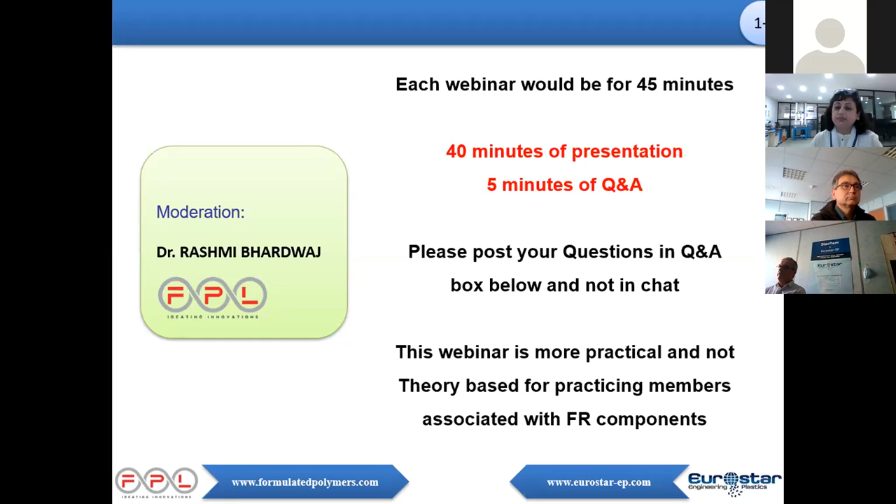This is the series which we are presenting. These are the flyers which have been circulated to all. We have completed 3 series: series 1, history, need and ISO classification of flame retardant chemistry.

Series 2, where we discussed flame retardant mechanism and selection criteria. Series 3, on testing of flame retardant characteristics, where we covered the UL 94 and the glow wire tests. Presently, we are doing series 4.

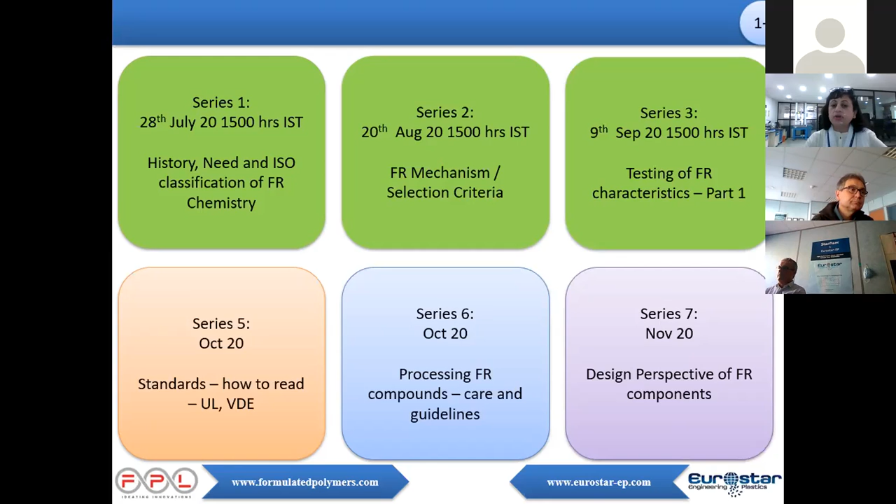Subsequently, we have planned series 5, which is on standards, how to read the UL and the VDE standards. Then we are doing a few more on processing, design perspectives, environmental impact, and some of our specialty products like cross-linked polymers.

We would appreciate if some industry professionals come forward and present some of the series. Some industry professionals have already agreed, so we are looking forward to their presentations. This is basically a learning program, and it's a revision for some and learning for others.

Since Eurostar EP and Formulated Polymers Limited specialize in compounds of engineering polymers, most of the examples will be based upon polyamides, acrylonitrile, butadiene styrene, polypropylene, and polycarbonates.

Now about the speakers: we have Mr. Krishnamoorthy, GM Operations, Formulated Polymers Limited. He has a master's in science with 29 plus years of experience in various fields including design, development, production, and quality assurance. He has almost 15 years of experience directly linked to development of 300 plus new products in the electrical, electronic, and automotive segments.

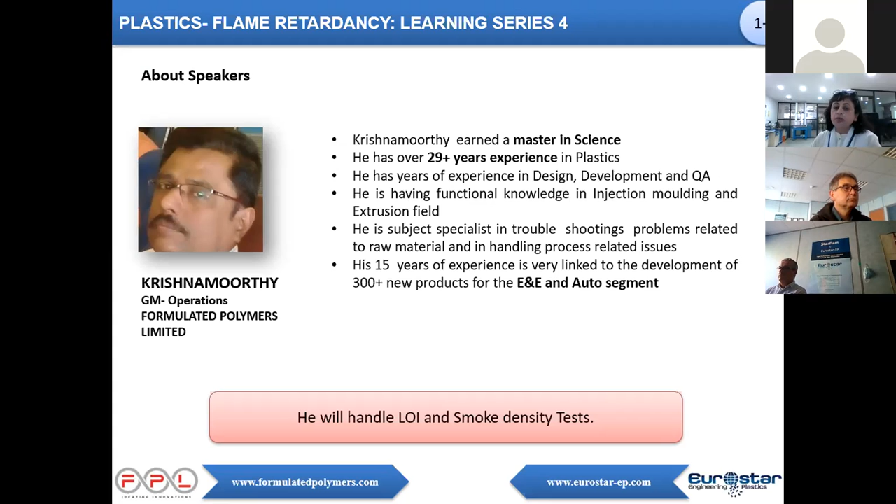Krishnamoorthy will be discussing LOI and the smoke density tests.

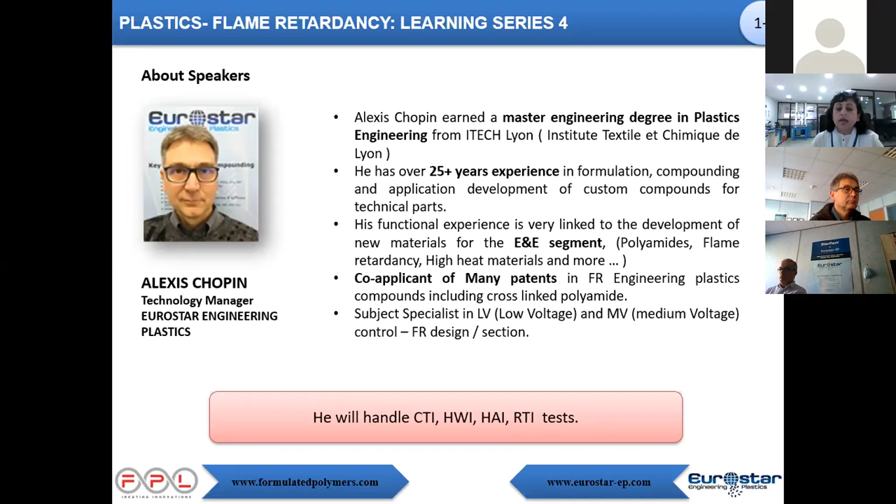Another speaker, Alexis Chopin, is Technology Manager at Eurostar Engineering Plastics. Alexis has a master's engineering degree in plastics engineering from ITECH Lyon. He has 25 plus years of experience in formulation, compounding, and application development. He is a co-applicant for many patents in FR engineering plastic compounds, including cross-linked polyamide. He's basically a very good subject specialist for low voltage and medium voltage controls, and he will be discussing CTI, hot wire ignition, HAI, and RTI tests in detail.

Just to do a quick recap of the series we've already carried out: the first series was basically on history, where we discussed fire accidents and the reasons why we started using flame retardants, as well as the ISO classification as per ISO 1043, which was discussed in detail.

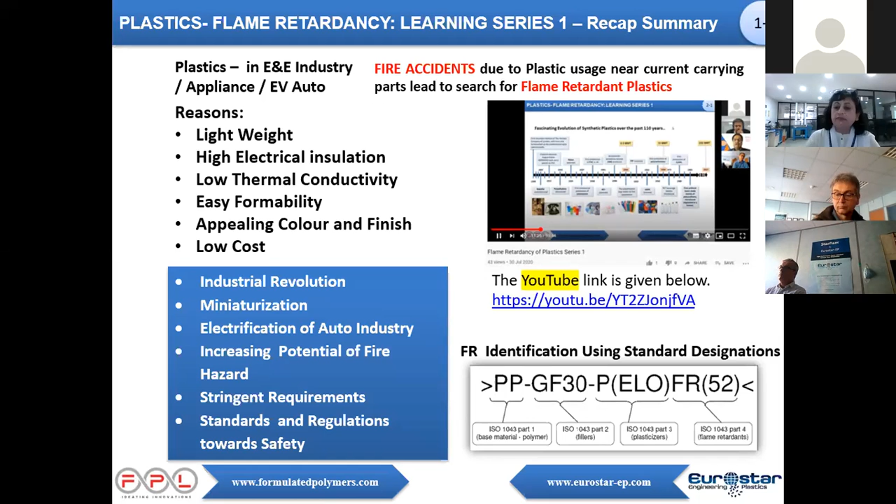Then we had series 2, where we discussed the flame retardant mechanism, various endothermic processes, radical quenching, thermal shielding, as well as the trend towards more environmentally friendly FR systems, and the legislations with respect to changes in environmental concerns.

We discussed halogenated, nitrogen, organic, and inorganic phosphorus compounds. We also discussed metal oxides, hydroxide salts, boron zinc compounds, silica compounds, and some specialties.

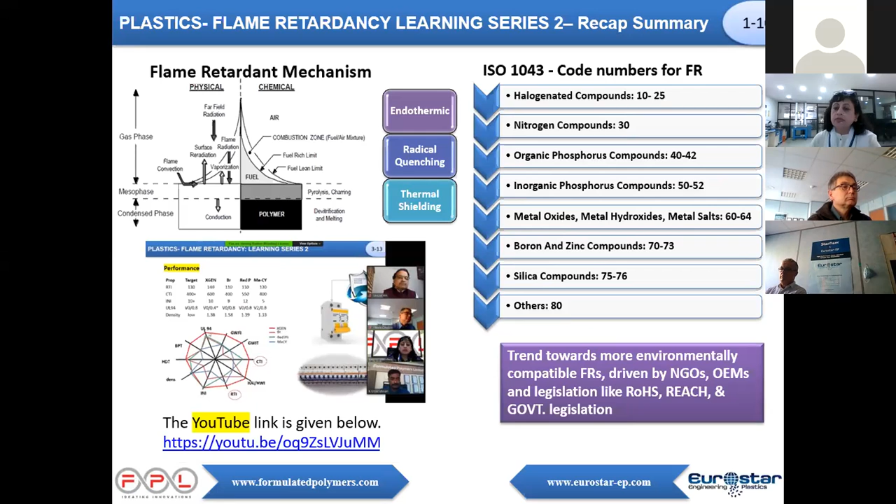This was our previous series 3, where we discussed in detail the flammability testing. UL 94 was discussed in detail with examples and actual applications. Glow wire flammability test was also covered, and we had live presentations showing how the entire test is carried out.

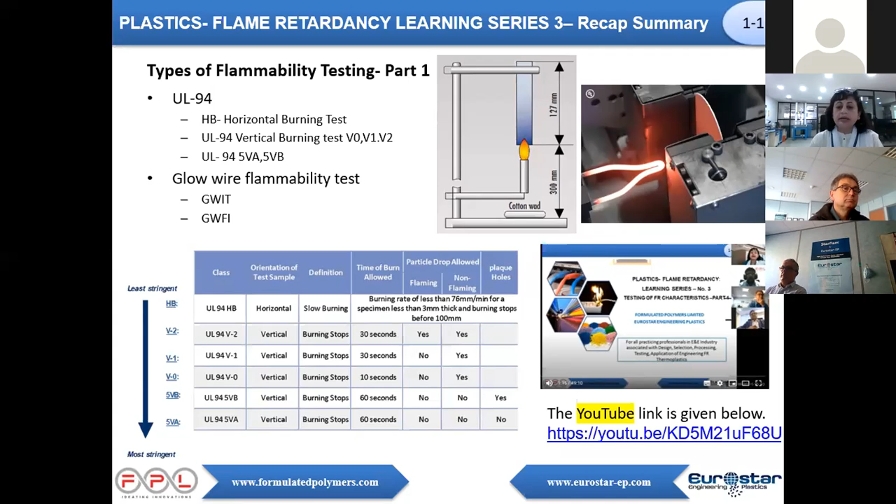I think now I'll hand it over to Krishnamoorthy. He will be discussing the tests. So I'll stop sharing now. Krishnamoorthy, you're invited to join.

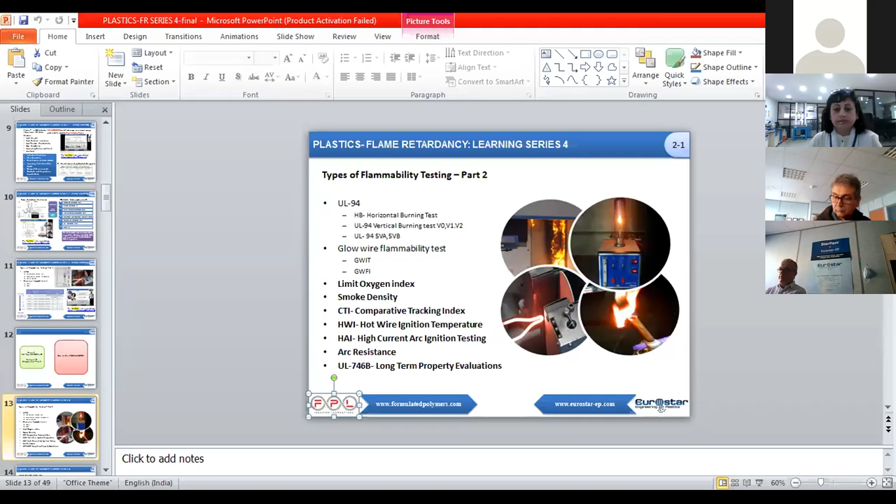This slide shows a list of flammability tests for plastics. This series of tests can help determine how products behave when exposed to flame.

Earlier in series 3, we discussed UL 94 and the glow wire flammability test, covering test standards, equipment required, test procedures, acceptance criteria, and areas of application in detail. In today's session, we are going to learn other flammability tests like LOI, smoke density, CTI, HAI, RTI, etc.

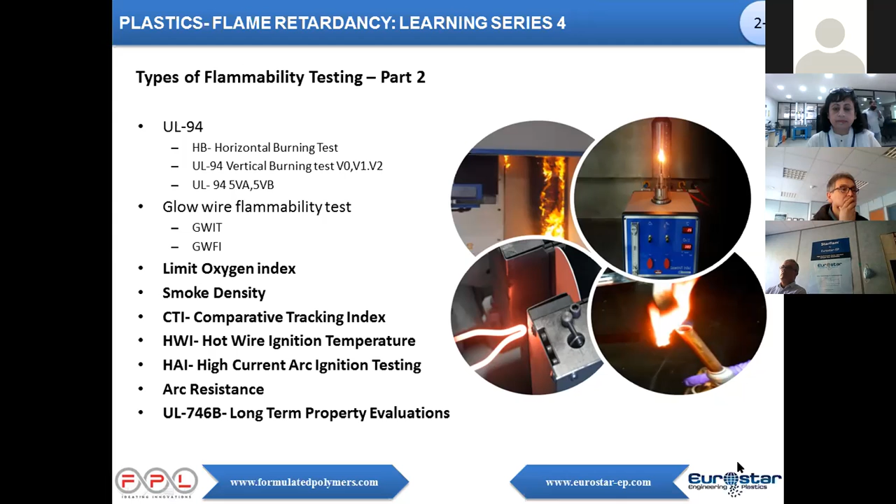We start with the limit oxygen index. The LOI test follows ASTM D2843. The limit oxygen index is a standard test method to measure the amount of oxygen required from the atmosphere to burn.

Three important things accelerate a fire glow. First, the fire source. Second, the fuel or burning material. Third, oxidation from the atmosphere. Pure air in the atmosphere contains 21% oxygen in normal conditions.

Materials with less than 21% LOI value are easily burned in the atmosphere. They absorb more oxygen from outside, which is added to the flame as fuel. Materials with more than 21% LOI value burn slowly.

There is a history behind this test. Before the successful 1969 moon mission, NASA faced a tragedy. In the year 1966, three American astronauts burned to death in a space capsule on top of the first Apollo rocket during a test. What happened?

Instead of air, the space capsule contained a high percentage of oxygen, perhaps planned for easy breathing. Apparently, a spark from the electrical equipment ignited the plastic insulation cabling, and the resulting flash fire caused the death of the astronauts.

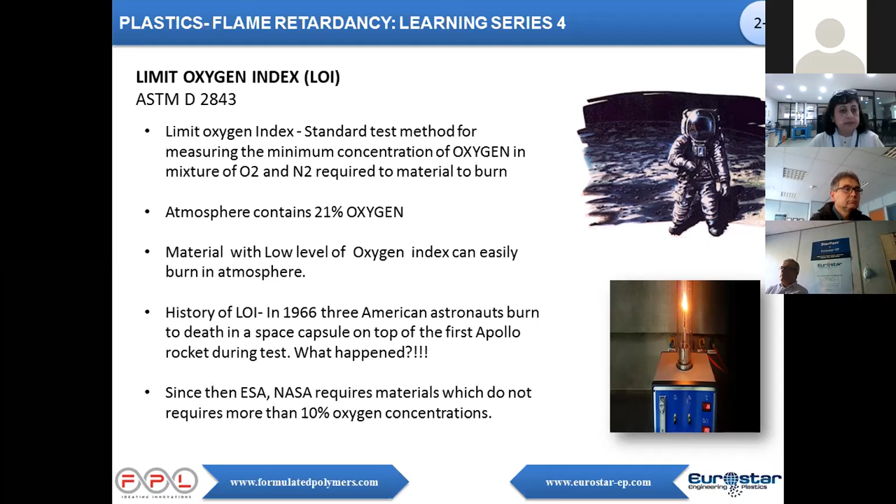For the LOI test, we require a glass chamber or chimney. The dimensions of the glass column height will be 450 to 500 mm, and the inner diameter requires 75 to 100 mm.

The test specimen can be any type: molding, cut piece, sheets, etc. An 80 mm length, 10 mm width, 4 mm thickness specimen is used in this test.

Here pure air is used as gas, 98% pure dry air with a 20.9% oxygen nitrogen mixture flowing inside the chimney as a gas. All ASTM and IEC standards require specimen conditioning before the test.

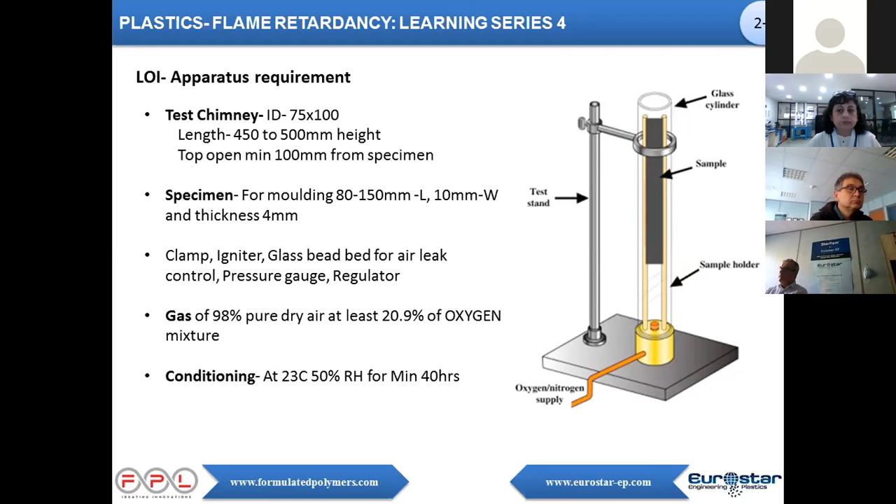Test specimens are conditioned for 40 hours in desiccators at 23 degrees, 50% RH. Glass beads are placed under the specimen holders to avoid air leaks.

The test procedure for LOI is simple and almost similar to the VB test. Here also, the specimen is clamped vertically in the test stand. Using our similar products' experience, the initial oxygen percentage is set.

The specimen is ignited using a pilot-type burner from the top of the column. Ignition time is 15 seconds at the top of the specimen. Remove the flame and allow the specimen to burn for 3 minutes or 50 mm length.

Record the rate of burning of the specimen as in the case of horizontal burning. If the specimen does not burn for the required time or length and self-extinguishes, we need to increase the oxygen level in the air mixture and repeat the test with a fresh specimen. The test continues till the LOI value is determined.

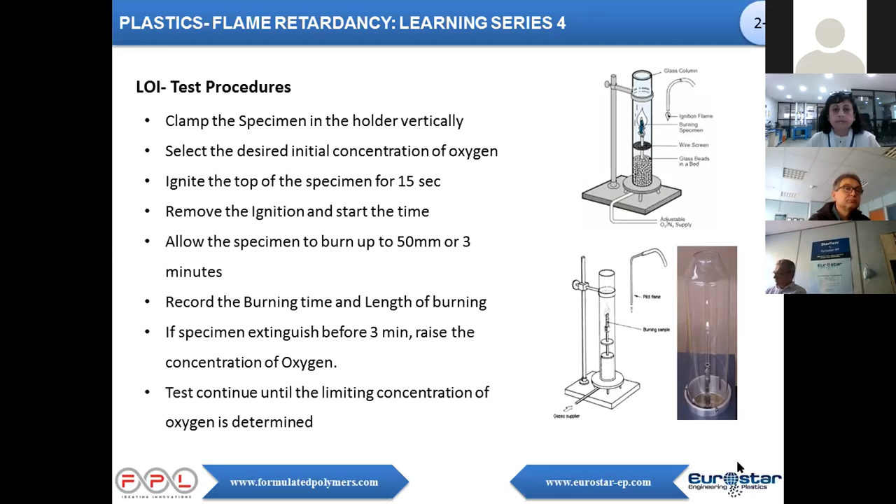Now let's move on to the LOI application part. Limit oxygen index is a scientific and technical measuring method of flammability. This test helps as a QC tool for designers in the field of resin product manufacturing.

Flammability of any material is influenced by several factors such as ease of ignition, flame spread, fire endurance, rate of heat release, and toxic gas smoke density. LOI plays a role in determining flame spread.

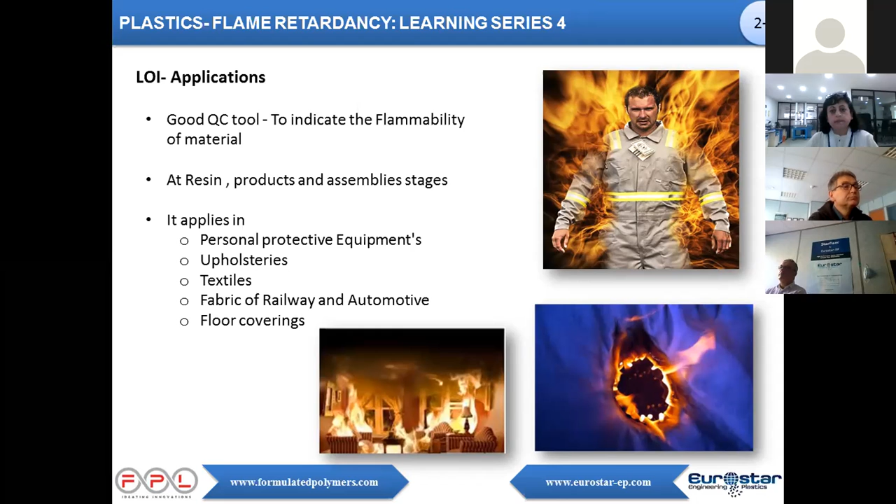It helps designers in the areas of personal protective equipment, electrical and electronics, textiles, mass transportation sectors like railways and aircraft, and automotives.

This slide shows the role of limit oxygen index in personal protective equipment. Fabrics are made from plastics. Many fabrics contain up to 60% plastics using polymers like polyester, nylon, and acrylic. The LOI test helps to design fabrics for firefighters and emergency frontline workers.

PPE are classified as civilian PPE and military PPE. It also classifies as Level A, Level B and Level C as shown in the slide.

Level A requires full protection for respiratory, skin and eye. Normally it requires the person working in unknown hazardous area, with LOI value of less than 20%, to use nylon flame retardant fabric with high LOI value greater than 25%.

In Level B category, it requires eye protection for respiratory and minimum level for skin and eye. Those persons normally working at greater than 20% LOI area require polyester type slow burning fabrics, containing LOI 22 to 25.

In medium category Level C, mostly for fire receivers or second line workers. For Level C persons, normal burning fabric like cotton will serve the purpose fully.

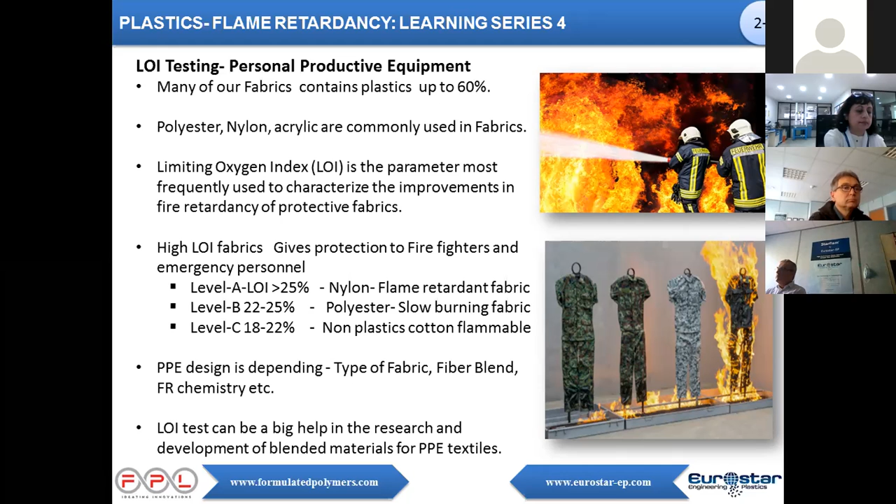Now we move on to LOI application in cable industries. Electric wiring is part of the fire protection system. Cable firing is a major cause for any electrical fire.

Plastics with high LOI values like nylon, PVC, PE are normally used for cable sheathing. Plastic coated cables do not burn in normal air, but in high oxygen content and overload environment, cables behave differently.

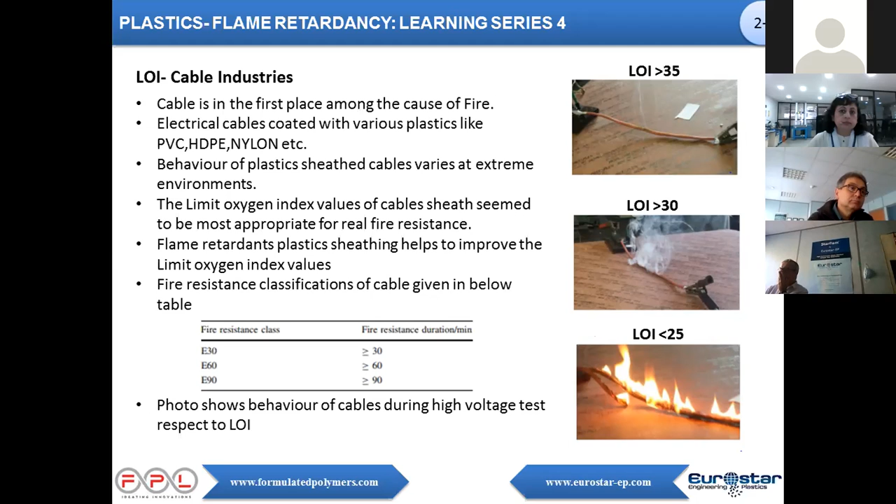In my last session of this FR series, we discussed in detail about the UL flammability test. This slide shows the relationship between LOI versus UL94.

Non-FR material meets LOI values below 20%. The slide graph shows LOI values increase with increase of burning rating.

V2 meets LOI of 22, and V1 will fall in the range of 25. Rating V0 will be close to 30 LOI value. Then for the highest rating, 5VA and 5VB match LOI greater than 35. Flame retardant compounds have the highest values of LOI.

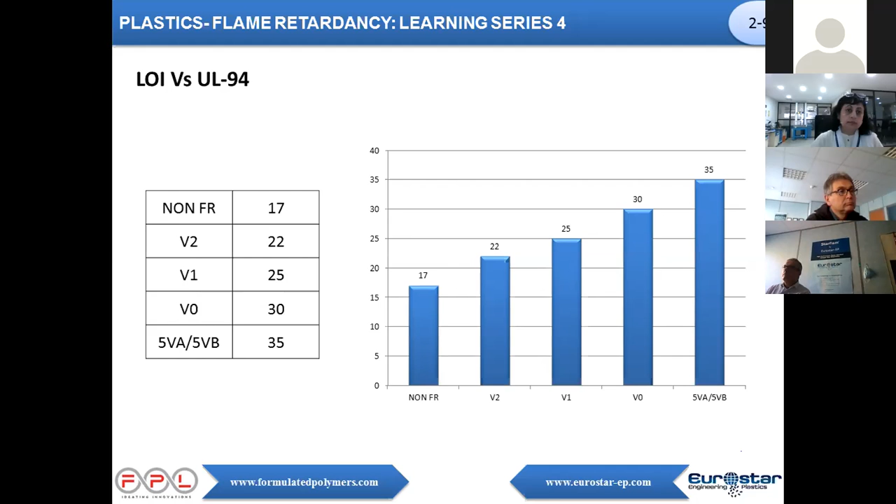And we move on to the next important flammability test, smoke density. Smoke inhalation is a major cause of death for victims of fires.

The biggest health threat from smoke is from fine particles. These microscopic particles can penetrate deep into the lungs and cause a range of health problems. 5% of material used in buildings release high amounts of smoke during burning.

Two standards given on the slide are widely used to measure smoke density. ASTM D2843 measures the density of smoke from the burning or decomposition of plastics. The next one, ASTM E662, covers determination of specific optical density of smoke generated by solid materials. This standard is mainly referred to for materials in railway, aircraft and other public transportation.

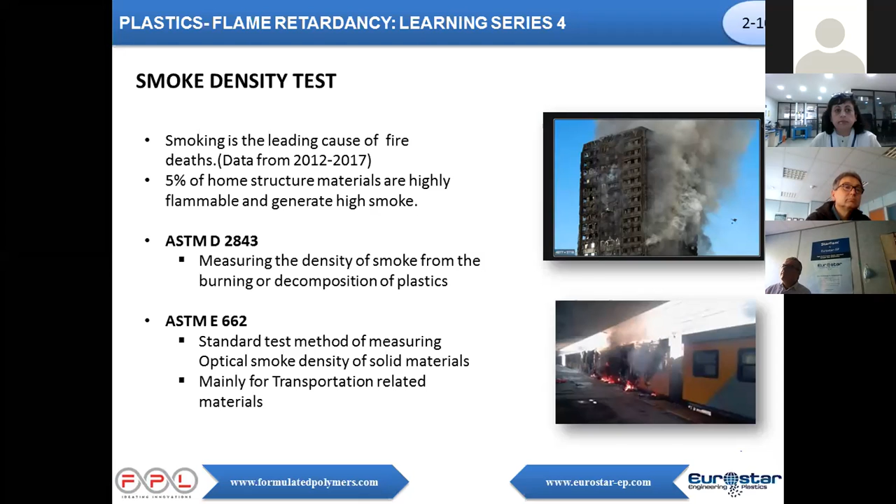ASTM D2843 standard measures smoke density for plastics. We see the smoke chamber design in the slide. It is made from aluminum with high heat resistant glass doors. It has an ignition system using propane gas, and the specimen holder will be there inside.

Light source of compact filament microscopic lamp. Box on the left side of the chamber contains the photometer. As with other tests, the timer device is also an important tool with an easy reset option.

Specimen needs to be conditioned before testing.

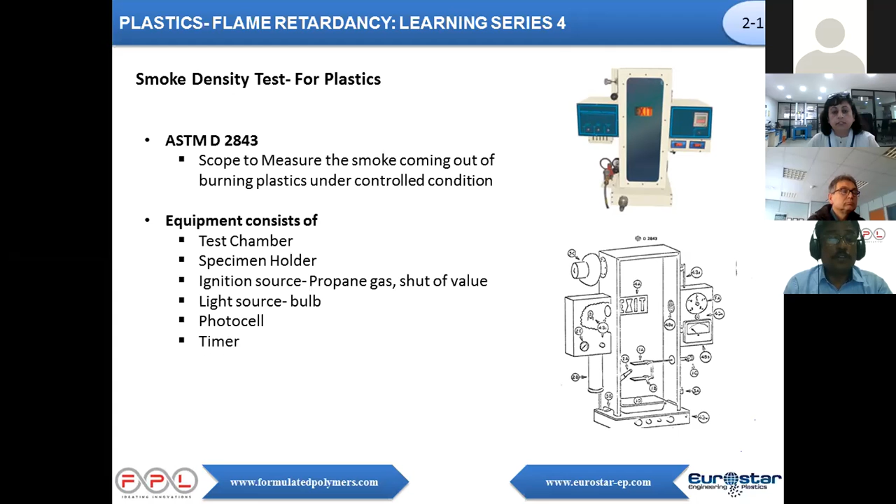Then the test procedure: first turn on the photocell lamp, switch on gas, ignite the burner and set pressure at 40 psi. Calibrate the photocell at zero absorption. Then ignite the specimen using the burner. Specimen should be ignited from the bottom.

Observe the light absorption at 15 seconds for a 4 minute duration. The test should be repeated with 3 sets of specimens. Maximum smoke density, total smoke generation can be calculated by drawing a slope between time and light absorption.

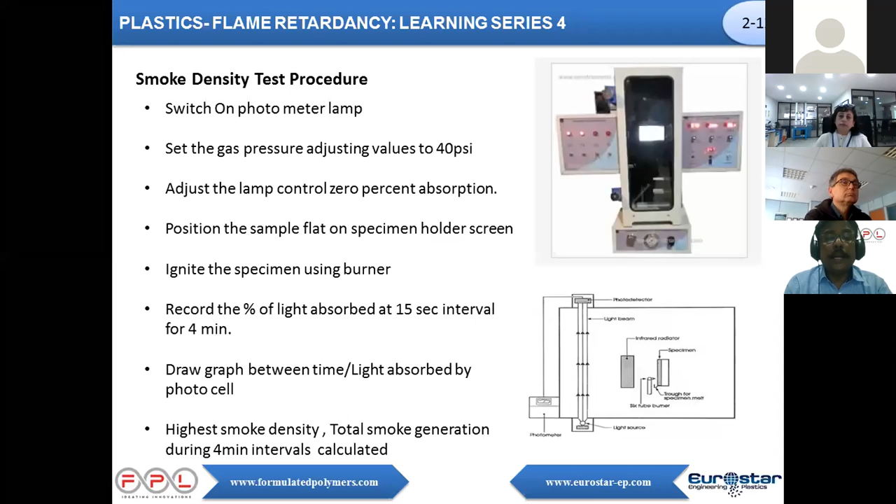The next one, ASTM E662. This method is used to measure optical smoke density arising from burning solid materials, widely used in transportation sectors like aircraft, railways, etc.

Test equipment is similar to the previous one. Here the specimen is ignited using radiant flux, and smoke density Dm and rate of smoke density Ds are to be measured.

Specification of rate of smoke density of certain materials used in railways is given in the slide. For the transport sector, it requires Ds of less than 100 at 90 seconds, and in certain cases it requires less than 200 at 240 seconds.

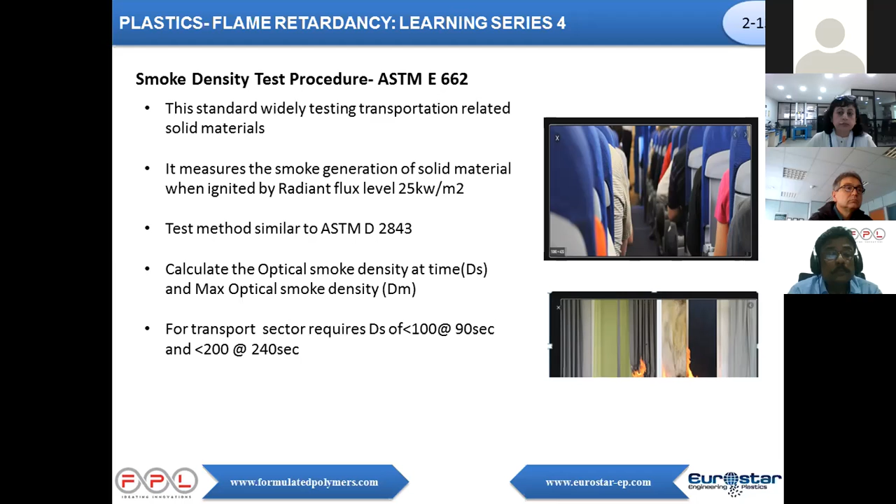The slide shows the amount of smoke released by various polymers when in contact with a fire source. From the chart at top, TSP refers to total smoke production and SPR tells peak smoke production.

HIPS and ABS show high levels of TSP and SPR, so these types of polymers are not the first choice in passenger compartments. Nylon, PP, and polyethylene have low rates of TSP and SPR, making them preferred for auto industries.

In the second graph, we see generation of carbon monoxide by various polymers when burning. Carbon monoxide is a narcotic gas and one of the major causes for fire-related fatalities. The chart again shows polyamide, PP, PE emit less amount compared to HIPS, PC, etc.

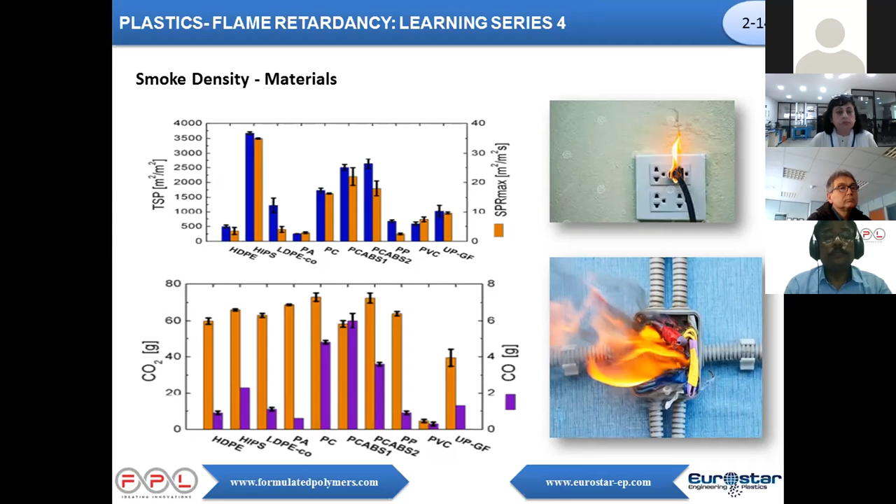This slide shows the list of plastic parts used in all types of mass transportation sectors. In aircraft, ceiling and wall panels, partitions are made up of plastics. In railways, seat frames, mattress frames, foot trays. And of course in passenger cars, seats and gears are all made from plastics.

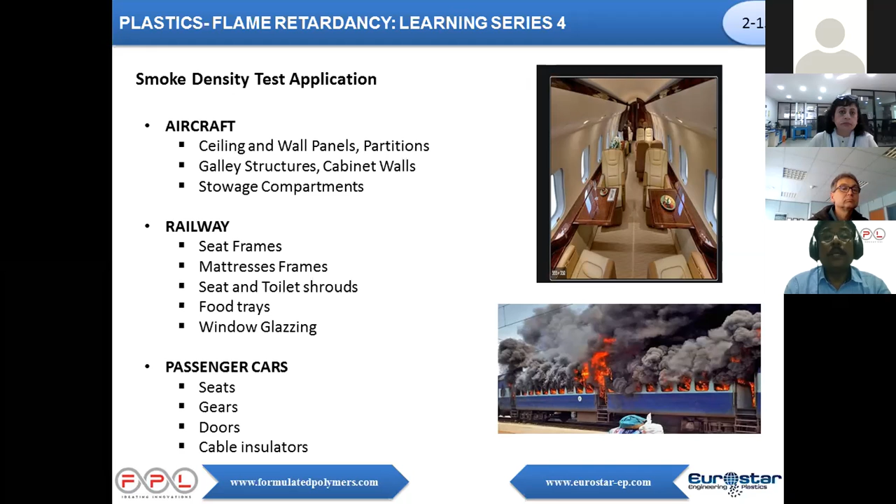Then we move on to the European Railway Standard for fire safety, EN 45545. It is introduced as a mandatory requirement for all of Europe, and it aims to protect passengers and rail personnel from onboard fire accidents in railways. The standard covers fire performance tests for all railway components like flooring, seats, cables, wire accessories, wire ducts, etc.

LOI, smoke density and smoke. There are three hazardous levels classified as HL1, HL2 and HL3, with HL1 being the lowest level and HL3 the highest level. Products are classified according to 26 requirements, R1 to R26, depending upon where the material is used.

For example, R1 covers ceiling and walls and window frames, and R26 covers small electronic parts. This classification is made based on how many kilometers the rail travels in tunnels, whether it is automatic, or whether it has a sleeping coach. So a lot of parameters are taken into consideration before drawing up the specifications.

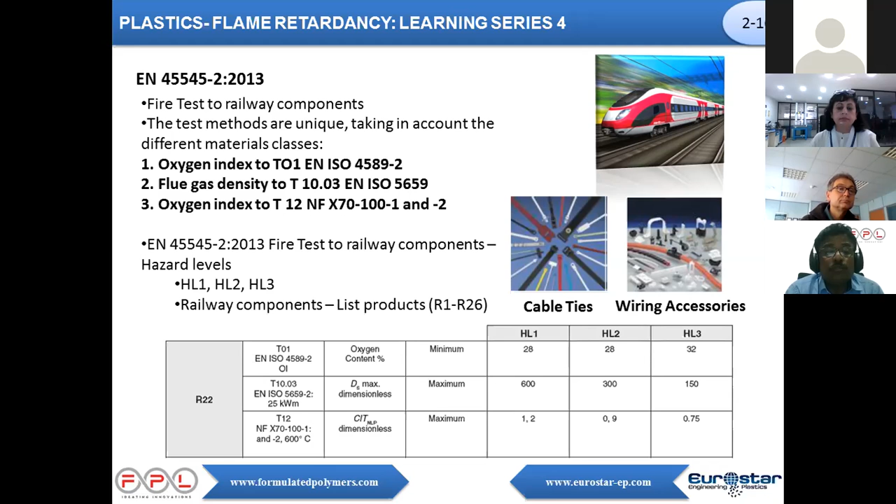Then also in glass filled ranges, 35 and 25% meet V0 at 0.8 mm. For HL3 requirements, cross-linkable polyamide 66 with 30% glass filled ranges are also available.

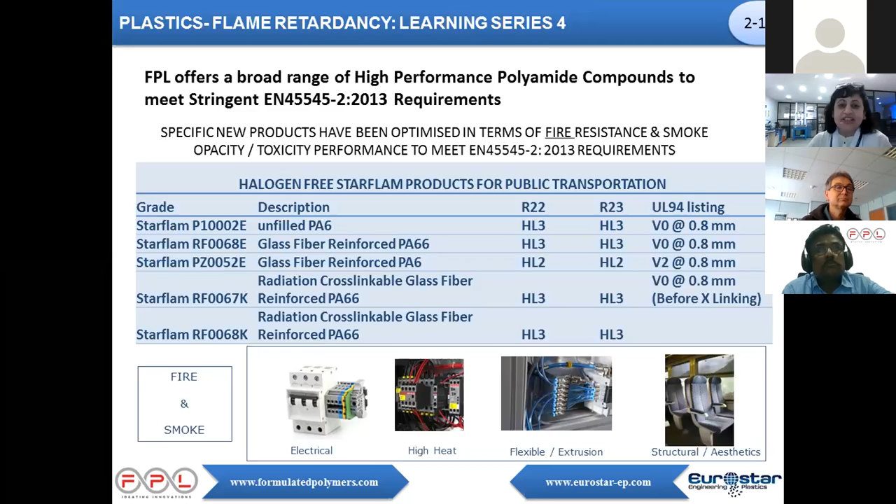Thank you, Krishnamoorthy, for explaining in detail the limiting oxygen index, especially going into the details on the ASTM standard D2863, which measures the minimum level of oxygen in the atmosphere in which any material can sustain flame for thermoplastics. Higher the LOI, the less the likelihood of combustion. We also understood ASTM standards D2843 and E662. What is the difference between the two standards?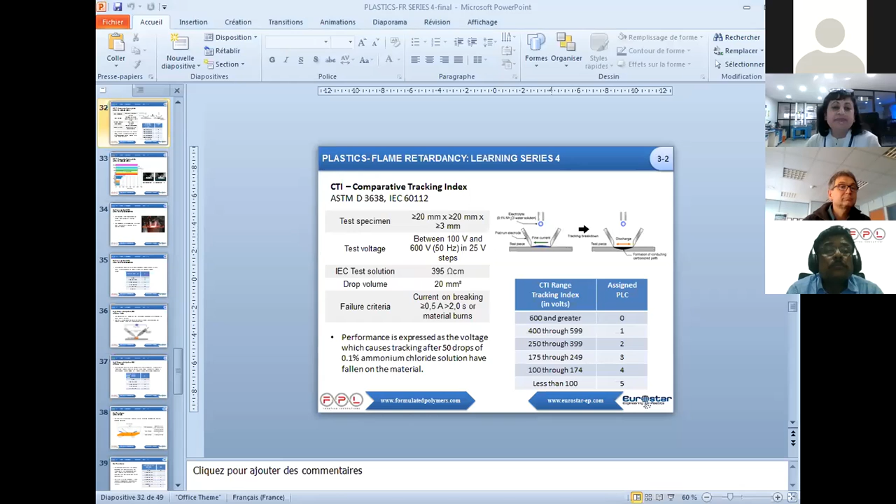Okay, I hope you can see my screen. Yes, we can, it works perfectly. Then we are lucky today.

Today we'll go through a few measurements that are of vital importance for E&E because they are mentioned in UL 746C, which is the basis for selection of material. We will start with the comparative tracking index, so-called CTI.

CTI is a test that simulates the case where a current develops due to surface contamination of a plastic insulator between two conductors. So basically, what is tracking? Tracking is a current flowing on the surface of an insulator between two electrodes caused either through pollution or degradation of the insulator. So tracking resistance is the ability of the insulator to prevent such current.

So what is the layout? The layout is quite simple. You have here a specimen, which is a UL standard specimen, two electrodes, and a system to release droplets. The liquid that composes these droplets is not pure water, because the test is meant to simulate contamination, so the water is loaded with 0.1% of ammonium chloride, which is an electronic pollutant.

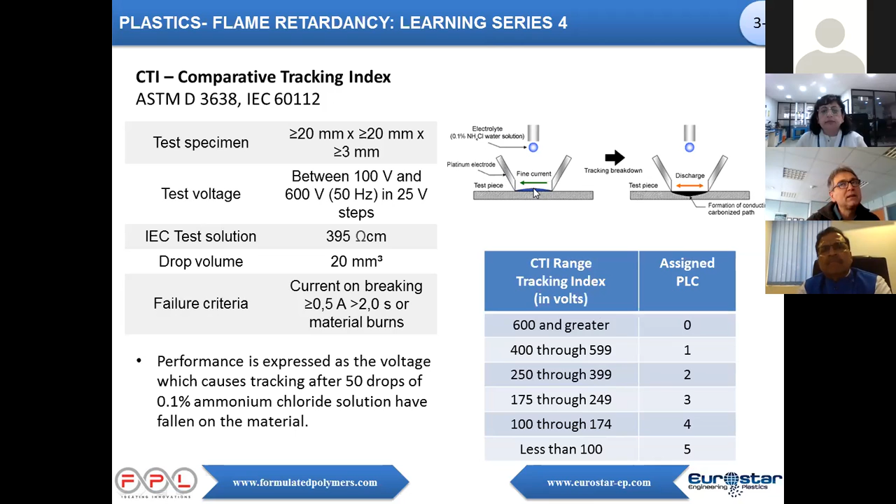There is a lot to say on this testing. Electrodes are in platinum, and it's very important because sometimes, for cost reasons, people are using - and the way we do sometimes - electrodes in brass, but you can have interaction and creation of conductive ions. For example, for some halogen-free material, if you have brass electrodes, then you can create a kind of conductive copper-phosphorus system that makes the material conductive. So it's very important if you compare that.

CTI of material - you can have very good material but have very poor CTI. For example, PPS is a very high thermal material, but you never see it close to an arc because it's very poor in CTI. Same thing, you've never seen an MCB closure for a contactor or a circuit breaker made of polycarbonate, because it's a good material, but it's very bad for arcing.

Then you see in this chart that material that behaves very well is polyamide 6 and 6,6. And it's not by chance that many materials for electrical and electronic application have been made for more than 30 years in nylon 6 or polyamide 6 or 6,6, because inherently it has a very good resistance to the arc.

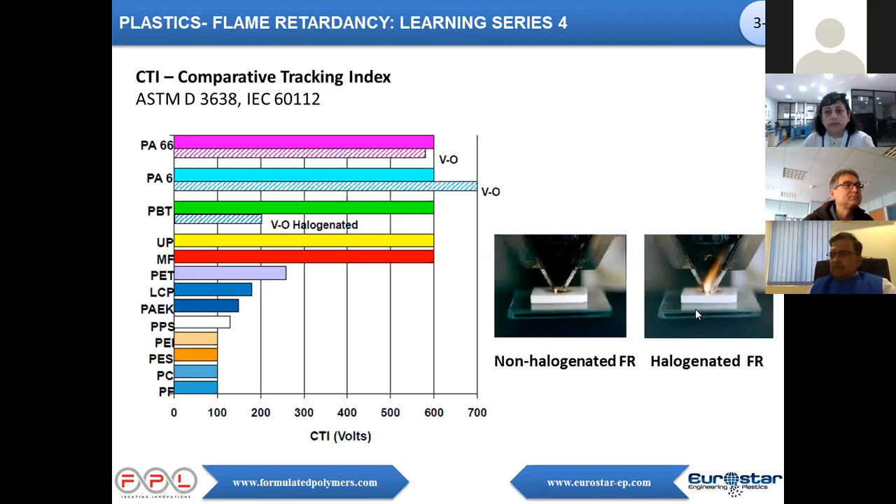In the small picture, you will see the behavior of a non-halogenated flame retardant. Typically, you see that there are a few generations of flames. It's very small, and very often non-halogenated materials have very nice CTI, sometimes 600 volts and above. For halogenated FR, you have most of the time creation of a conductive path, and the CTI is more limited, around 300 to 400 volts.

Another test which is of prime importance for electrical application, which you will also find in UL 746C, is the hot wire ignition. The objective in this case is to judge the ease of ignition of a plastic part which is in contact with a heat source, but not an open flame. The test simulates the case that a plastic part is in contact with an overheated electrical wire.

This is what you see here. So basically, you wrap a wire onto a UL bar, like KK described. You apply a current, and then you measure the time to collapse. The collapse is measured either by flaming, or if the material survives well, sometimes you have a material which is melting and vanishing from the wires. The time has to be stopped when there is no more material to be burned.

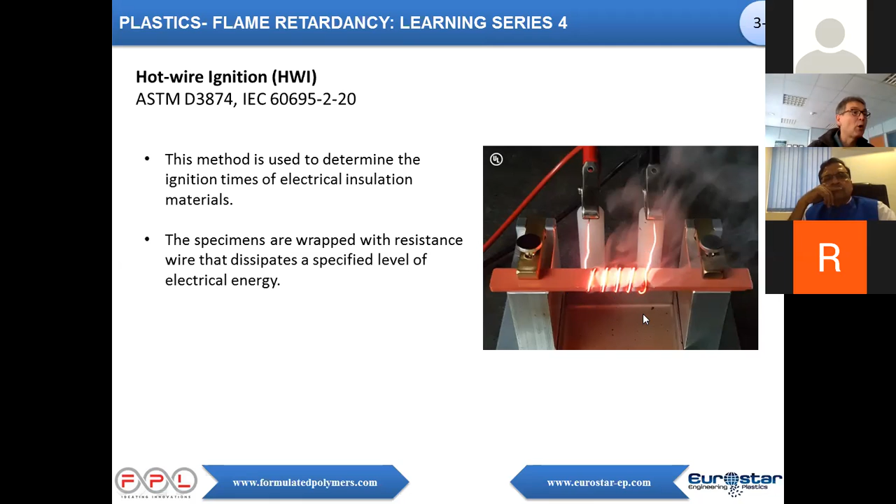Then too, you are measuring the time. So you see, for example, a material which takes fire in less than 5 seconds has a very high PLC, which is not material suitable for the application. But we have material that can withstand above 2 minutes, meaning that will have a PLC 0.

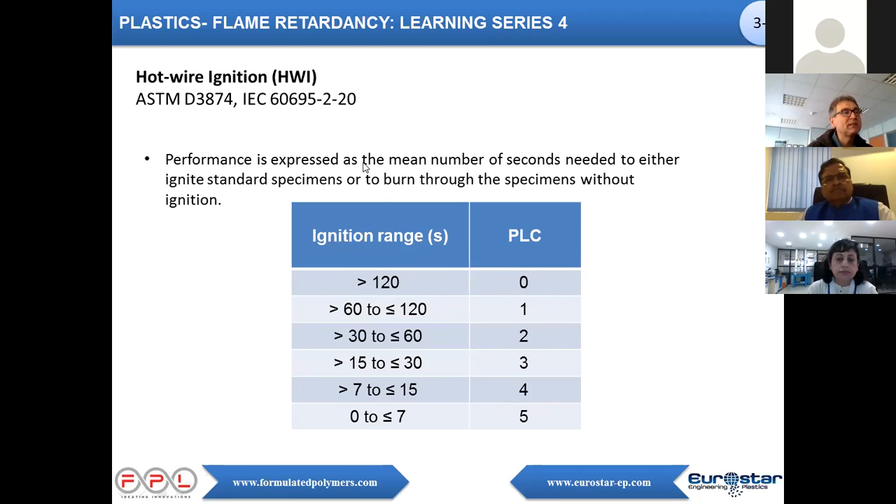In our range, we have many materials in the range of PLC 0, 1, and 2. And in some cases it's really of vital importance, because if you have a material which is of PLC of 1 or 0, you will see, maybe in the next presentation, you can choose material that has still V2 or even HB in performance.

Then another test is the high-ampere arc ignition. It's a bit different. The test, in fact, simulates the situation that an arc occurs between 2 electrodes under a low voltage but a high current.

For example, 2 connector pins on a plug. The arc is created on the resin of a plastic, on the surface of resin. So you have a fixed electrode, which is in copper, and a movable electrode, which is in stainless steel, under normal current.

And you are moving back and forth this electrode 40 times per minute to create an arc. And then you will have to see the time to ignition.

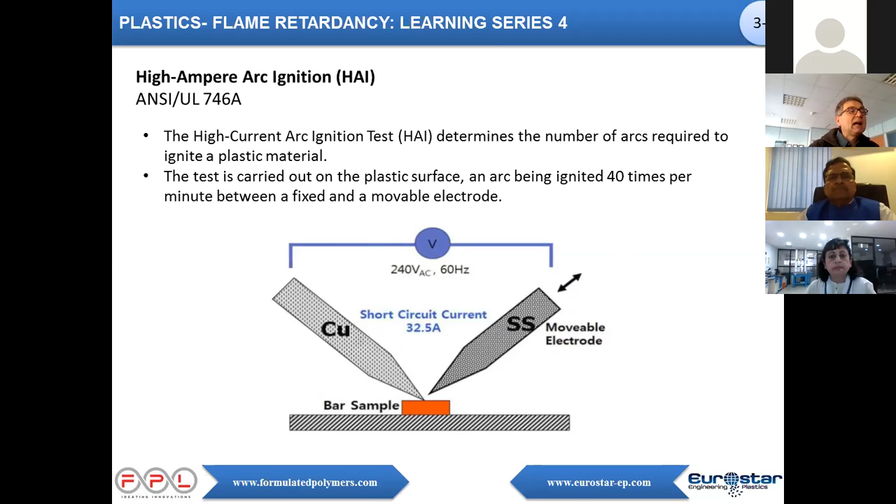And the same thing as previously, it is rated as or by a number of arcs, or by a PLC.

So the same thing, of course, if the material withstands the arc for a long period of time, a great number of arcs, then the PLC is 0, meaning that the material is well suitable for electrical application.

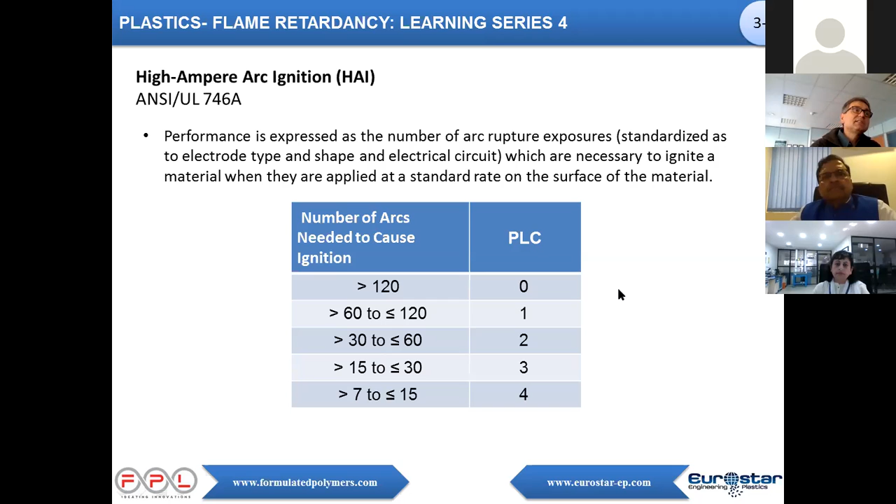These are quite simple tests, but most of the time they are run directly at UL, because it's not an apparatus that you find in every laboratory, of course.

Huh? The arc resistance. Arc resistance is another test. It's very similar in principle to the CTI, but in this case the voltage is very high. So this method is intended to differentiate in a preliminary fashion among similar materials with respect to their resistance to...

...the action of a high voltage, low current arc close to the surface of an insulation, tending to form a conductive path, causing the material to become conductive.

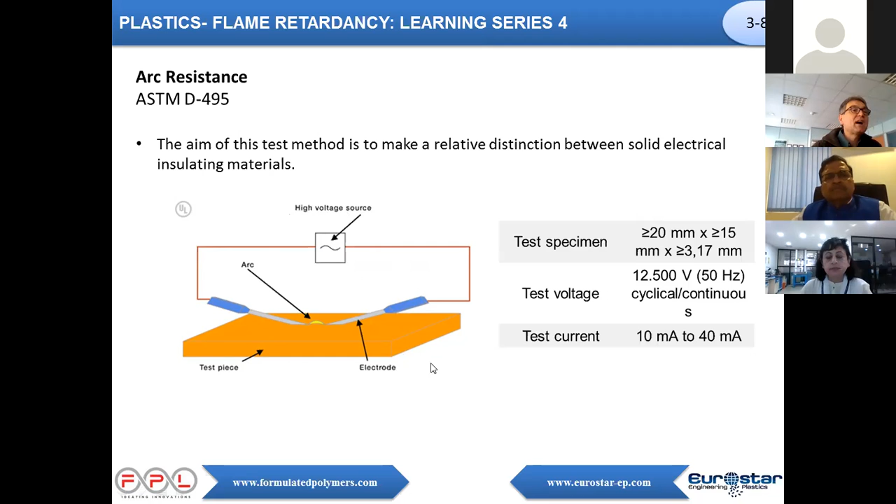So this time, the electrode is not moving, it's fixed, but you have a high voltage that is applied to the system, and you are measuring the time to arcing.

So it's expressed in seconds, meaning that the voltage is varying automatically, and you're measuring the time to formation of a conductive path.

And depending on the results, of course, you have different performance levels. So if the time is below 1 minute, then the material is really not suitable for E&E application. And if it's above many minutes, then you can really use it for applications in E&E.

So this was, let's say, most of what you will call the short-term properties at UL. So you will see, in the next presentation, I think there is a table that summarizes that.

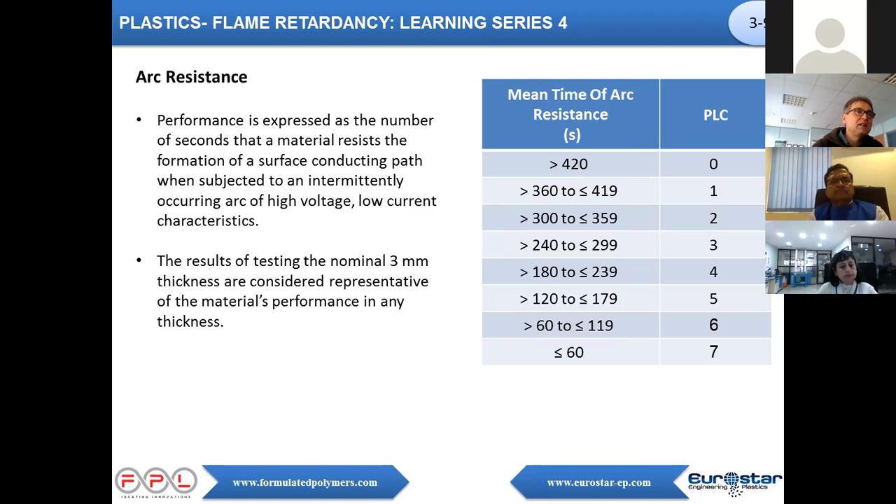And depending on the different level, you have the right or not the right to use the material for an electrical application if you have to apply to UL standard.

Another measurement which is very, very important for the application is the RTI, Relative Thermal Index. Because when people ask the question, what is the thermal resistance of a material, most people are thinking about HDT.

HDT is the heat deflection temperature. It's listed on the datasheet. It's a very easily available material property, but the problem is that HDT is measuring only the short-term properties.

It does not indicate the temperature at which a material can resist for a very long period of time. But of course, when someone designs a part, it does not have to survive just during the homologation phases.

It has to, for E&E application, last almost 20 years. So there is a way to measure this almost continuous in-use temperature, and it's done by UL, and it is called the Relative Thermal Index.

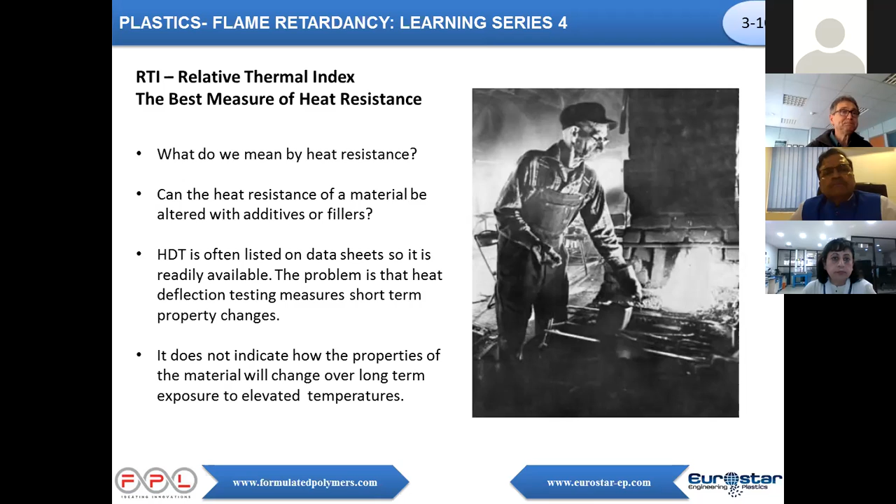So it's measured according to standards. Relative Thermal Index, or temperature index, is the maximum service temperature that the material can survive for an infinite period of time. Of course, nobody can simulate an infinite period of time, so UL has a method to test with time equivalence temperature, where we can forecast for 60,000 hours, which means 7 years.

So how is it done? It is done in ovens. We are submitting specimens, or aging specimens, in ovens at different temperatures. And from time to time, specimens are removed from the oven and tested mechanically or electrically.

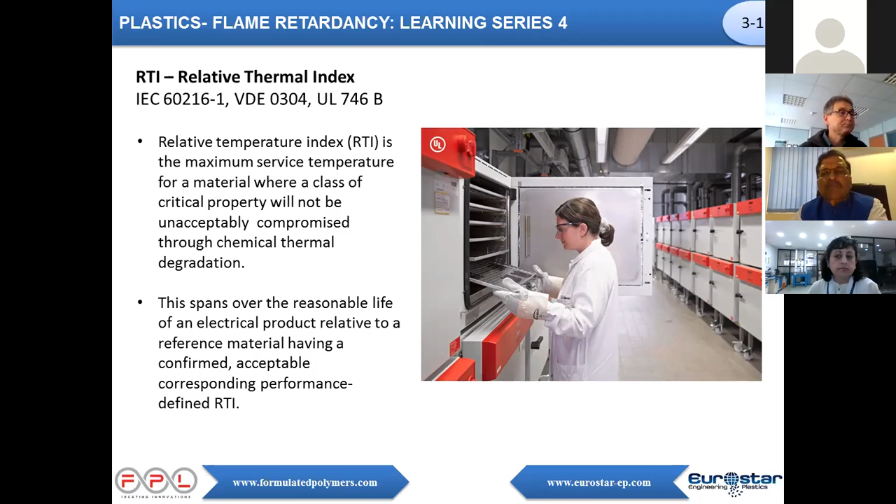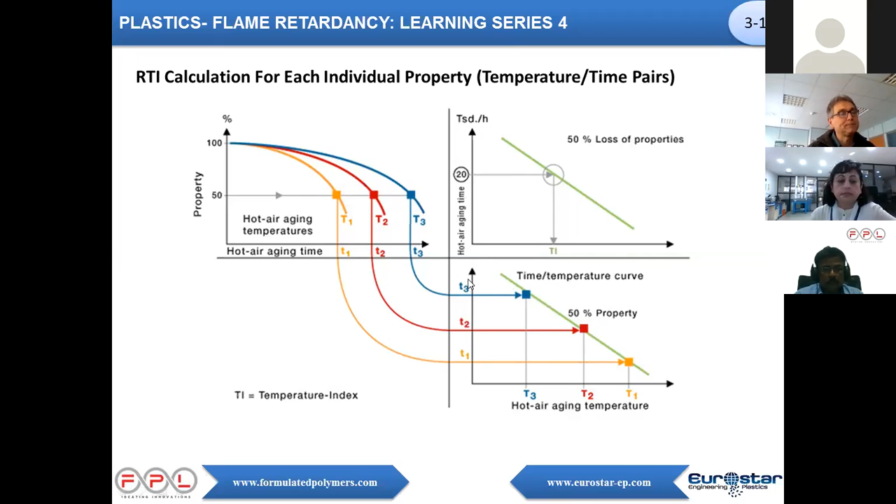So what do we determine? Basically, this is what you will see on the yellow card: 3 different properties. The electrical RTI, which, simplifying, is the continuous in-use temperature for electrical properties, measured most of the time on dielectric strength. The RTI with impact, measured most of the time on impact bars, Charpy or Izod. And the mechanical strength without impact, most of the time measured on tensile bars. So you have 3 important properties that simulate the continuous in-use maximum temperature for this material.

A warning from my side: it does not mean you can use this material at this temperature, because the material will lose 50% of this property after a certain period, 7 years, and it gives no idea about the surface of the material. The material will be oxidized and the color carbon black. Nonetheless, it will withstand, let's say, according to the standard.

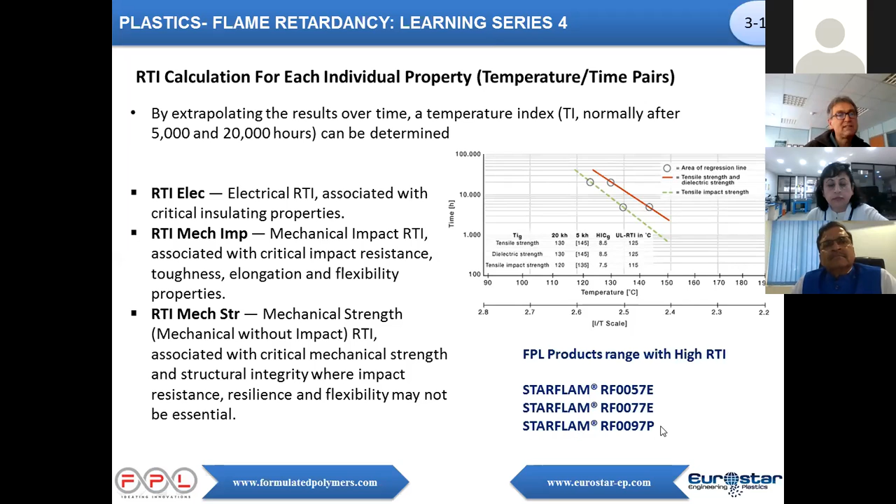FPL and Eurostar are really a very nice range of products, and it's a very nice asset, because you have to know that this test lasts about 18 months, and it's really a big investment. A yellow card with a full RTI costs $100,000. We've been in this market for so many years that we have very well-documented material, and we even have material with RTI above 150 degrees C, which is quite exceptional.

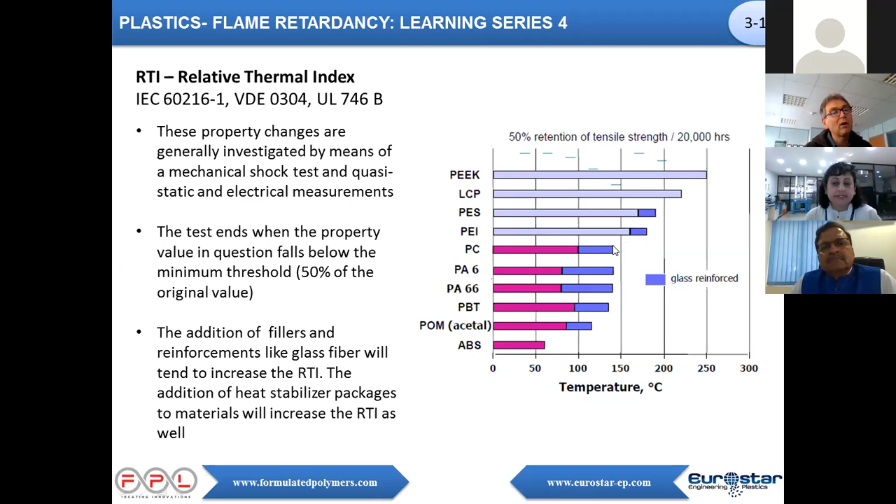I have to go fast because I see I'm almost late. But you see on the material properties chart for standard material, the RTI ranging across different polymers. Nylons, polyamide 6 and polyamide 6,6, already have a good RTI that can be boosted with glass fiber and stabilizer. In our case, we have materials with RTI above 150 degrees C, so this is really a strength.

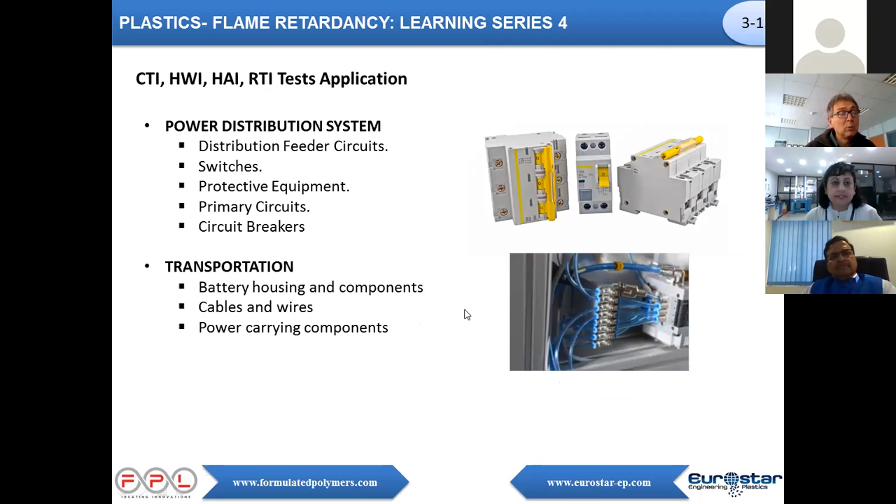Where does it apply? Mainly for power distribution systems, feeders, switches, protective equipment, circuit breakers, and increasingly in transportation — for battery housing, cable, power carrying components — and over time it will really come into electrical vehicles.

So this is a table we put in every presentation, because we think it's really relevant to show that there's no perfect material. If you see a material with a good RTI, it has nice things, but it's always a matter of compromise. We have a full range within our combined FPL and Eurostar portfolio, fitting most material needs.

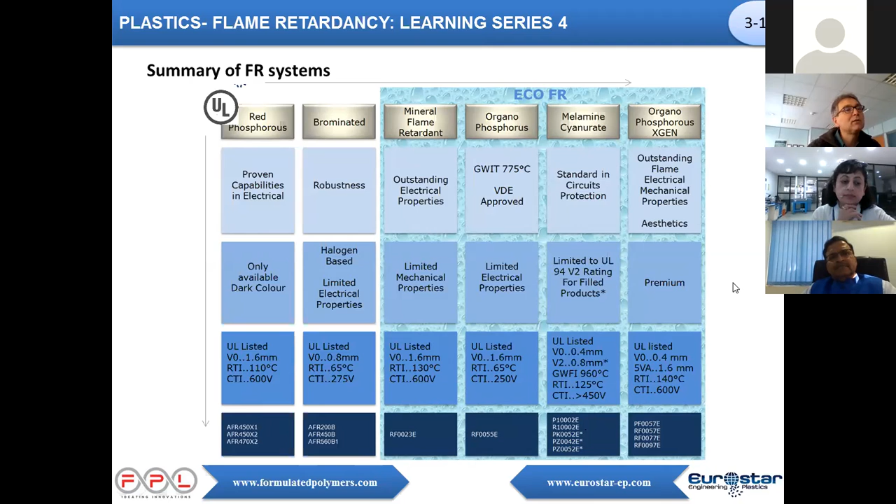Thank you very much, Alexei, for explaining in detail the testing procedure and correlating it with the application requirements. Comparative tracking index you discussed in quite detail, and we found it very interesting. I actually didn't want to stop you because the way you explained it is very wonderful and very informative. So what you discussed is that live parts, current carrying parts, must be resistant to tracking.

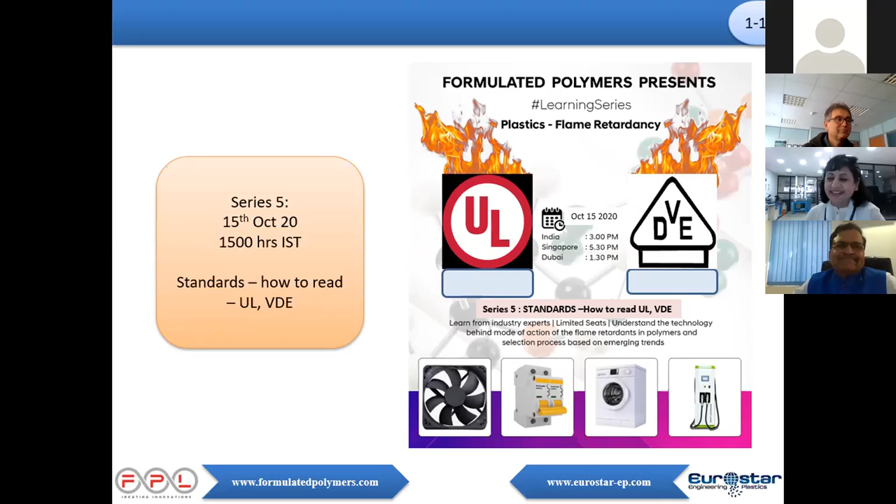It was nice, thank you. Bye, yeah bye.